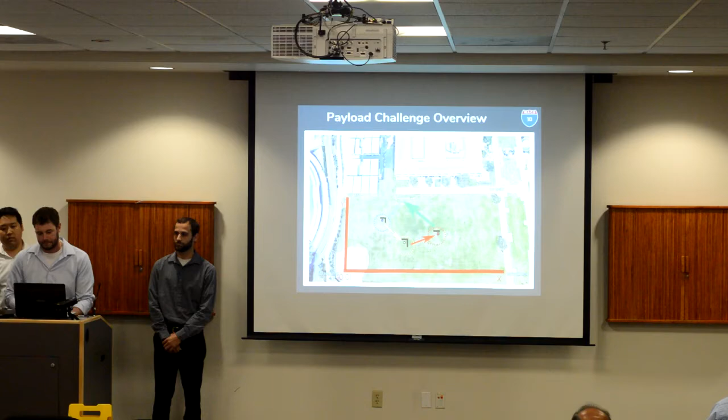This is our land-based closed-source solution for the payload challenge. For the physical aspect, the RACS was built on the Red Cat Volcano EPX RC truck platform. This platform provides us with a 7.2 volt 2000 milliamp hour nickel metal hydride battery, DC brush motor with electronic speed control, 4-wheel drive with conventional steering, aluminum cap oil-filled suspension, and a sturdy plastic construction, making it ideal for off-road operation.

This vehicle has been outfitted with a variety of sensors in strategic locations to optimize their performance. These could be subcategorized into 3 categories: navigation, avoidance, and target acquisition.

In the front, we can see the LiDAR and the sonar sensors to maximize obstruction detection. At an altitude is the visual sensor with a negative angle to expand its field of view. The RF receiver, digital compass, and GPS are as far away from the motor as possible to avoid electromagnetic interference, and the payload delivery module is at the back to unload cargo while on the move.

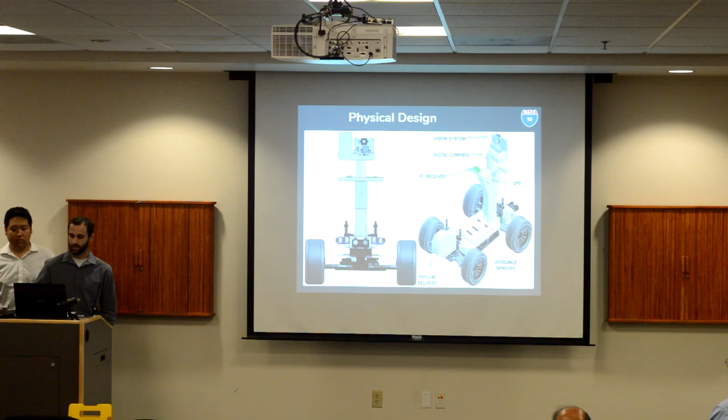My name is Connor, and I'll be talking about the RACS block diagram. The RACS block diagram was broken down into a modular way where we could separate a large problem into more simpler solutions. As you can see, we have subsystems that are taking in sensor data and sending that to our main microcontroller, which controls the motor, our payload, and our mobility, which is our steering.

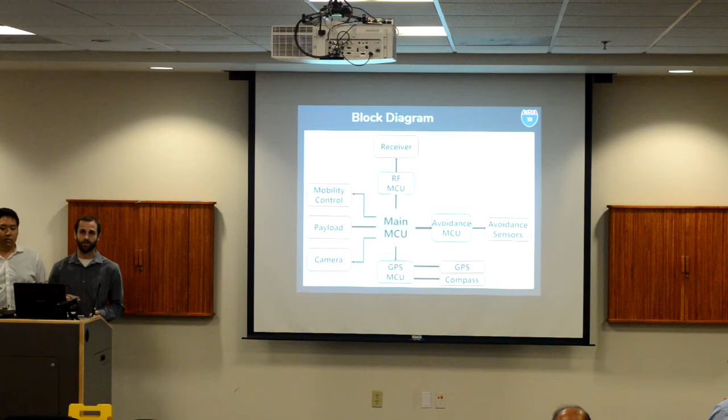The GPS microcontroller receives the compass and GPS information via UART and SPI communication. Our avoidance microcontroller is getting information from the LiDAR and ultrasonic sensors to avoid obstacles, while our RF microcontroller is telling us the proximity of our target and which target the signal is coming from.

My name is Sean. Once we acquire the GPS location on the challenge day, we'll have the digital compass magnetometer as a guidance to our car, and we'll use avoidance sensors to avoid any obstacles on the way. Once we reach the payload location, we'll use the vision camera to take control of the ESC and servo to get to the closer proximity of the drop zone location.

And once we deliver the payload, the ESC and servo will maneuver to the next GPS location. And for the second part of the challenge, we'll use the RF for target acquisition, then repeat the same process.

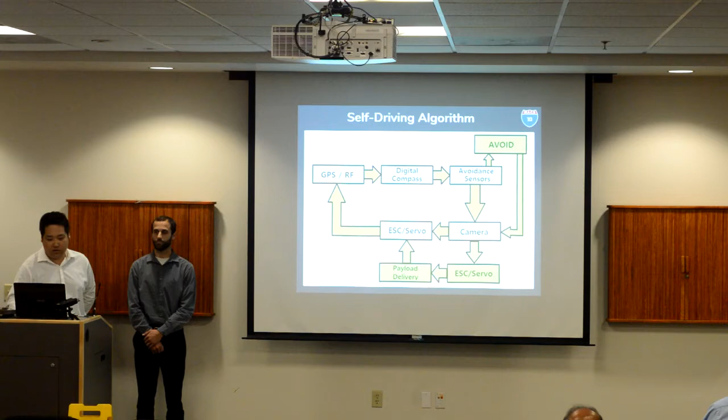Our navigation system updates about every foot at 10 miles an hour, which is about every 50 milliseconds. It receives RMC data via the GPS and compass information, 0 to 360 degrees from our compass. Our microcontroller then parses that information and converts it to a Cartesian format and passes it in a nicely formatted packet to the main microcontroller to interpret that data.

Once that data is taken from the main microcontroller, it's filtered to find the actual best location that is most likely from where you were heading before. It then takes all that information and makes real-time decisions on the next location to drive to.

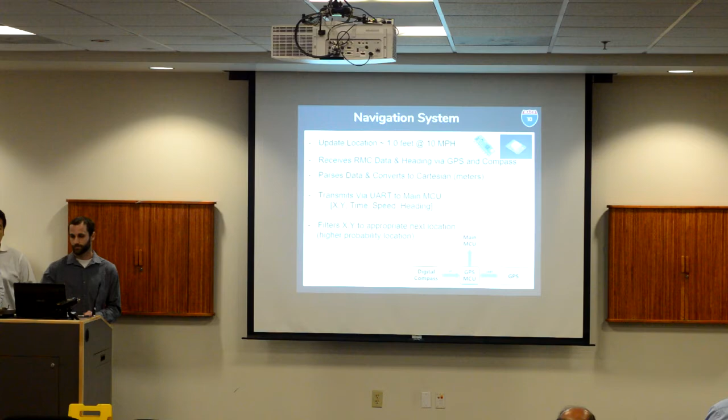Good morning, everyone. My name is Taylor. I've designed the RACS RF subsystem, and as mentioned before, the primary purpose of this system is to identify the active target in the second portion of the competition.

To do so, we'll make use of Micrel's MicroRF 220 receiver IC, as you can see here on the screen. Each target provides us with a squelch feature to reduce the noise on the demodulated output signal that it provides our PIC16 for processing. Each target transmits a unique signal frequency ID: red for 880 hertz, yellow 1.2 kilohertz, and blue 1.3 kilohertz.

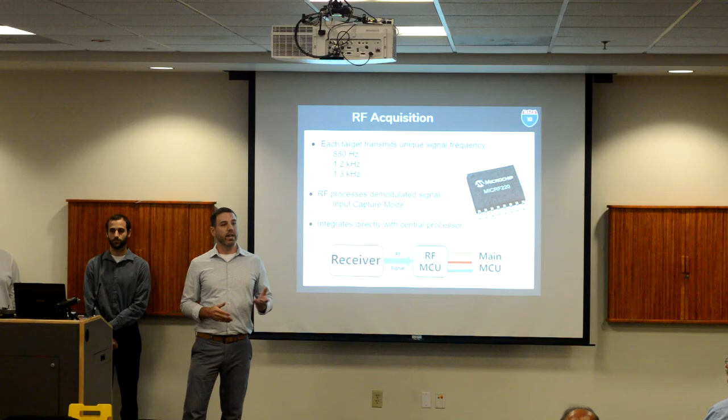We'll send this demodulated output signal to the PIC16 microcontroller, where we use the input capture mode to time the signals, determine the frequency and period, and process these signals, which will communicate digitally with the main microcontroller to indicate which target is active, so we can update the GPS, motor controls, and steering control systems to navigate smoothly to our active target. Thank you.

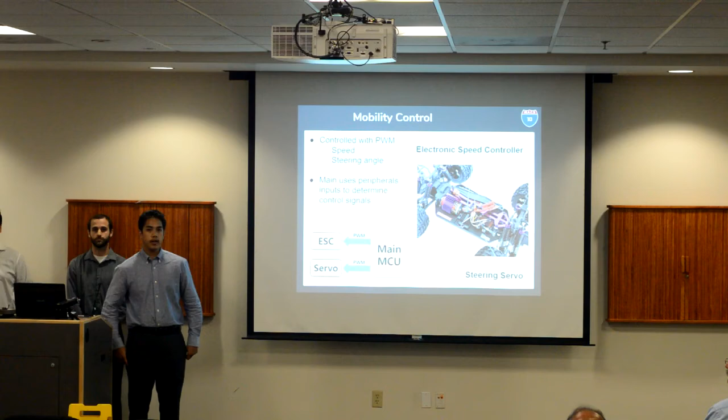Hello, everybody. My name is Roger, and I'll be discussing motor control. So, after acquiring our target and determining an optimal path to our destination, our main microcontroller will send signals to an ESC and steering servo to control both the speed and direction of our vehicle.

We achieve this by using the PIC32's output compare feature to create specific pulse widths that range between 1 and 2 milliseconds. By varying these pulse widths, we were able to develop multiple speed settings and have a higher resolution while turning. This simple drive system, combined with our other sensors, will allow us to move autonomously on the field.

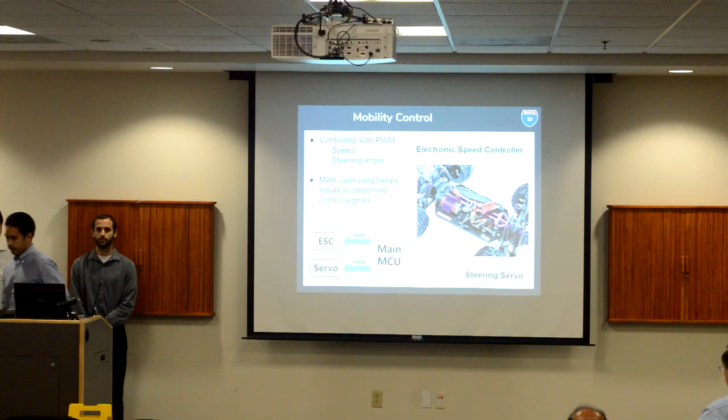My name is Jessica, and I'll be talking about the avoidance subsystem.

The avoidance subsystem consists of one LiDAR sensor and two ultrasonic sensors. The LiDAR sensor serves as our primary proximity sensor, whereas the ultrasonic sensors are placed on either side. The LiDAR sensor works by sending out a near-infrared laser signal and taking the time delay from the signal reflected back. We utilize timer gates on the PIC16 to measure the pulse width of the signal reflected back, then calculate the distance based on the speed of light.

Once an object is detected within 5 feet in front of the sensor, we send a pulse to our main microcontroller that there's an object in front of it, and the two ultrasonic sensors on either side are triggered to send out a pulse to measure if there's anything on either side. The ultrasonic sensors work similar to the LiDAR sensor; however, instead of sending out a laser pulse, they send out an ultrasonic pulse, and their distance is measured using the speed of sound instead of the speed of light.

All of these sensors communicate to our PIC16 through digital pulses, and this data is then forwarded on to our main microcontroller.

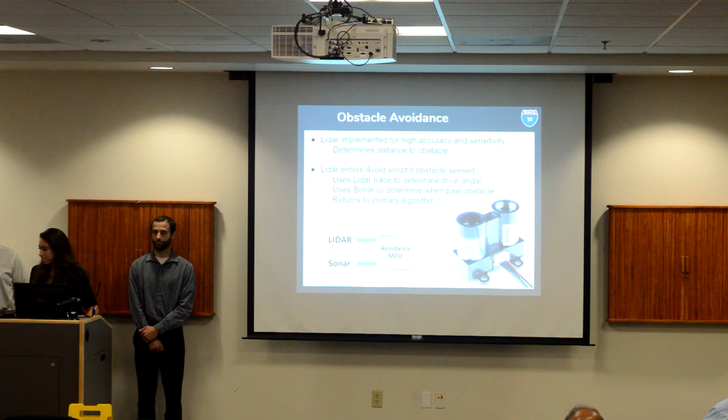Hi everyone, I'm Ryan, and I'm going to talk a little bit about our drop zone detection.

Since our challenge consists of 3 colored targets, we are in need of a color sensor. We chose to fill this need with the Pixy camera. It's a color detecting camera that can be taught to detect specific color signatures, in our case red, yellow, and blue. Using this capability, we communicate directly to our main microcontroller, giving it computer vision.

From our computer vision, we're looking for 2 signals. One is the detection flag, telling our vehicle, hey, I see the target, I'm going to take over the motors. And two is the position of the target. Using the X position of the target, our computer vision works with our ESC to navigate for optimal position for payload delivery.

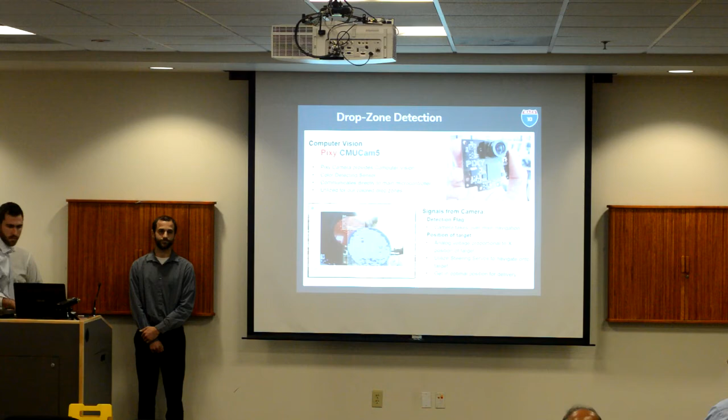Good morning, everyone. My name is Blake, and I'll be going over the payload delivery mechanism. Once we've reached our target, we need a reliable way to both store and deliver the payload. For our payload, we decided to use a poker chip-sized wafer, which allowed us to maximize our space efficiency on the vehicle.

Our actual design features 3D printed ABS plastic and 2 stationary brackets mounted to the rear of the vehicle. The interior is a rotating fan that holds the poker chips. As the fan rotates down through the servo's pulse widths, the poker chips will slide past this opening and drop down on the position.

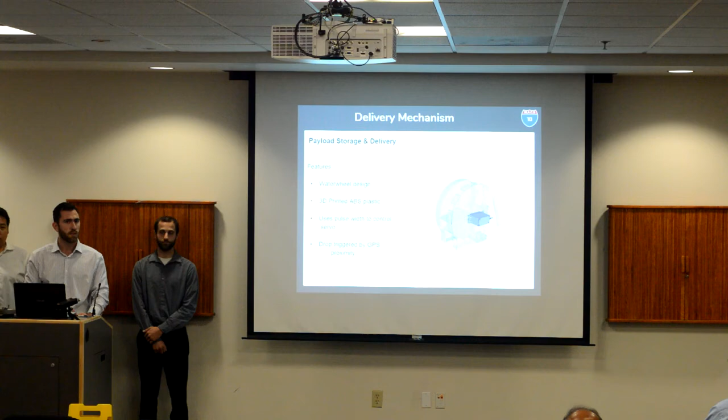The servo is connected to our main microcontroller, the PIC32, and once our current GPS sensitivity is within desired specification of our target GPS, it'll send the correct pulse width to the servo that'll drop the correct payload. Here's a little demonstration through SolidWorks: as you can see, when the first chip drops, the later 2 are still protected in the system, proving the reliability of our system.

Good morning, everybody. My name is Marcus.

So basically, these are our goals and milestones. Our first goal was to learn the PIC32, the microchip controlling the main systems. We were able to do research and discover all the peripherals needed to make this work, accomplishing this by the end of February.

Our next goal was to be able to drive our car in a figure eight, which we accomplished outside of the library by the end of March. In April, we did various tests and integrated different parts of the system to make sure everything worked.

A main highlight I like about the system was we were able to get the camera to sense the color and tell the car to drive, and it chased the color around. Now we are in the month of May, doing final testing to make sure we get everything right, so by the end of the competition we are ready to compete.

For our budget, we tried to be as cost efficient as possible. First, we made sure we bought a bunch of RC cars, around 35% of our budget. Next was sensors, making sure we got the ultrasonics and the camera, about 44% of our budget. Next is taxes and shipping, about 9%. Our last item, miscellaneous items such as the servo and the payload dispenser, was about 13% of our budget. Our remaining budget ended up close to $150.

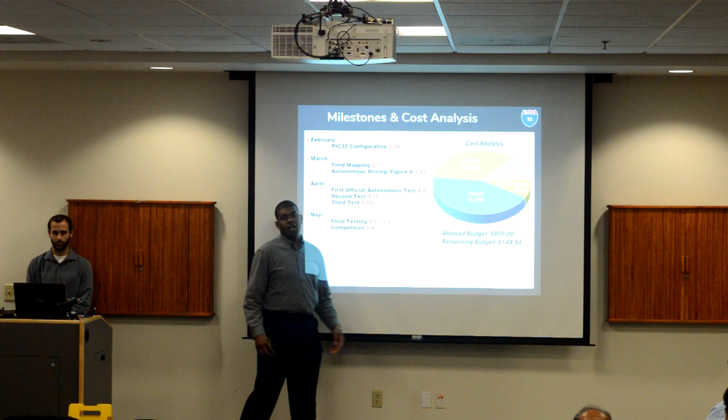Ladies and gentlemen, boys and girls, this 2017 annual Payload Challenge will be coming to you this Thursday at E&S Field, right by the music building. Watch as Team Max takes on the Death Star of Team Vader and the non-conforming evil rebels of Team Resistance.